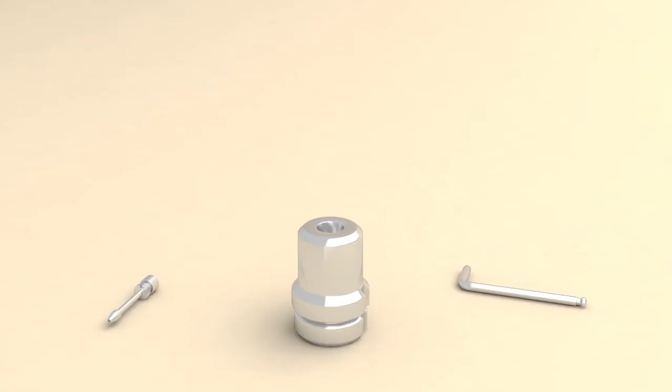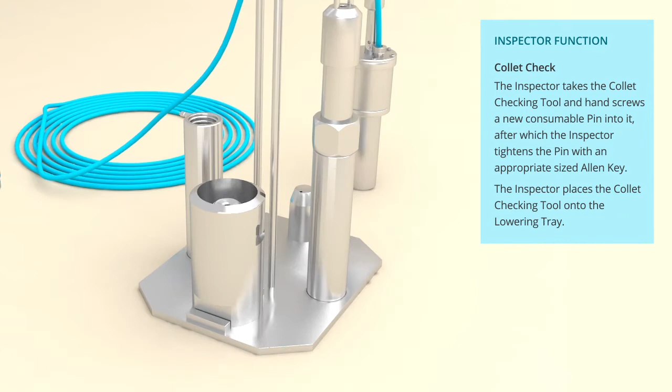Collet check. The inspector takes the collet checking tool and hand screws a new consumable pin into it. After that, the inspector tightens the pin with an appropriately sized Allen key. The inspector places the collet checking tool onto the lowering tray.

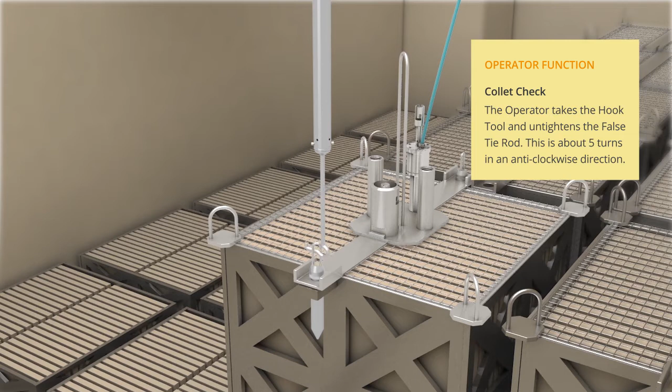The operator uses the crane to lower the lowering tray next to the tie rod that needs to be checked. The operator takes the hook tool and untightens the false tie rod. This is roughly 5 turns in an anti-clockwise direction.

Still using the hook tool, the operator places the false tie rod in one of the empty tubes on the lowering tray and turns it a couple of times clockwise to ensure that the false tie rod is securely fastened in the tube.

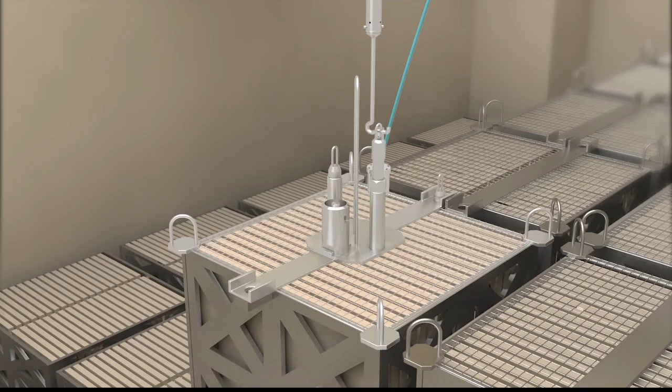The operator now unscrews the tie rod from the lowering tray, using the hook tool, and places it over the threaded hole. Tightens it clockwise with roughly 5 turns until it can turn no more. No torque is to be applied.

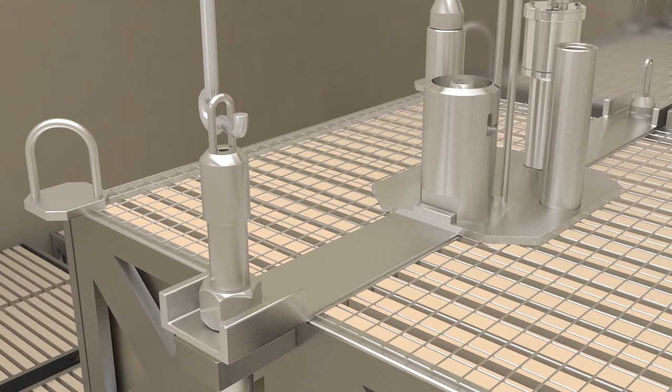To ensure the tie rod has been correctly threaded into the hole and is secure, the operator takes the hook tool and vertically tries to lift the tie rod. There should be no movement if it is placed correctly. The hook tool can now be hung from the bridge.

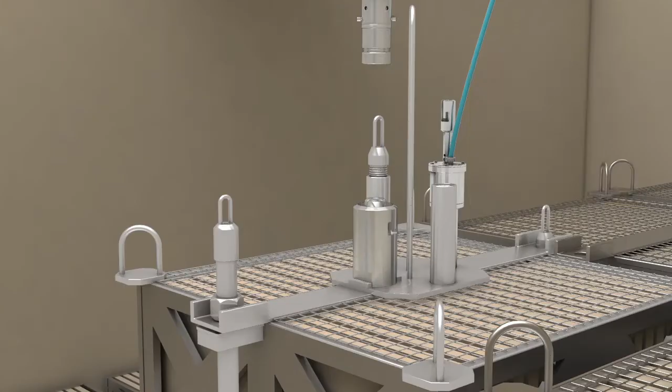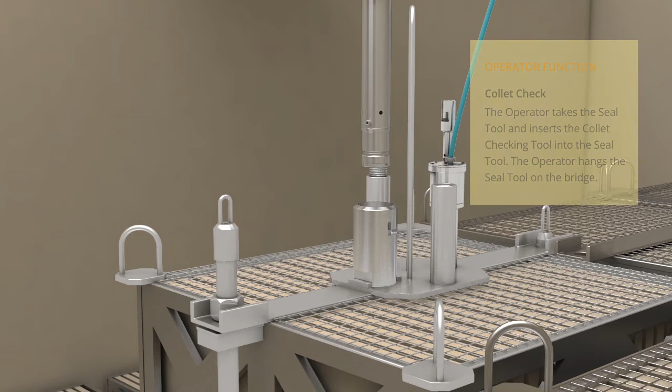The operator takes the seal tool and inserts the collet checking tool into the seal tool. The operator hangs the seal tool on the bridge. The operator takes the donut tool and places it over the donut on the lowering tray.

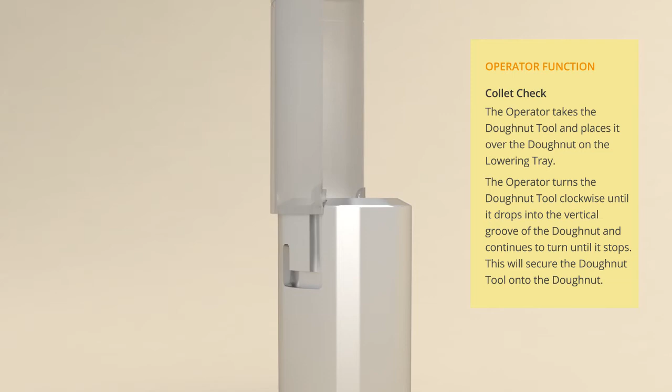The operator turns the donut tool clockwise until it drops into the vertical groove on the donut. The operator continues to turn the donut clockwise until it stops. This will ensure the donut tool is secured onto the donut. Still using the donut tool, with the donut fixed inside it, the operator lifts the donut off the lowering tray and places the donut tool over the tie rod.

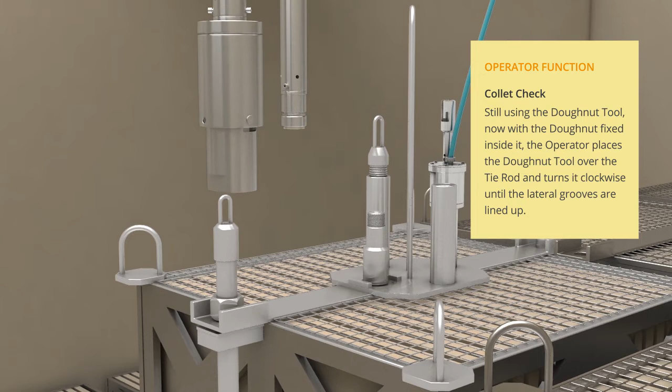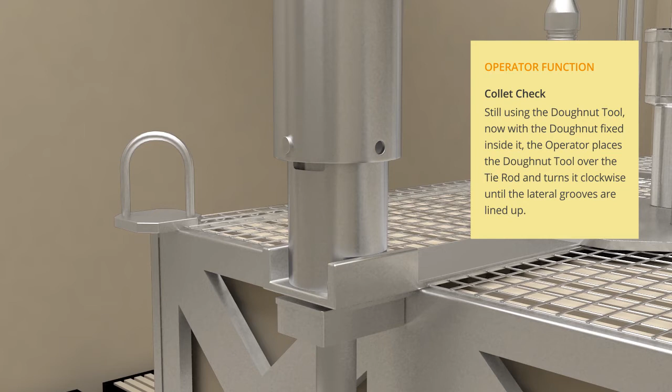The operator turns the donut tool clockwise until the grooves are lined up and the donut falls a few millimeters into the secure position. To separate the doughnut tool from the doughnut, the operator turns it anti-clockwise until it stops. The operator lifts the donut tool, which should now be separated from the donut, and hangs the tool on the bridge.

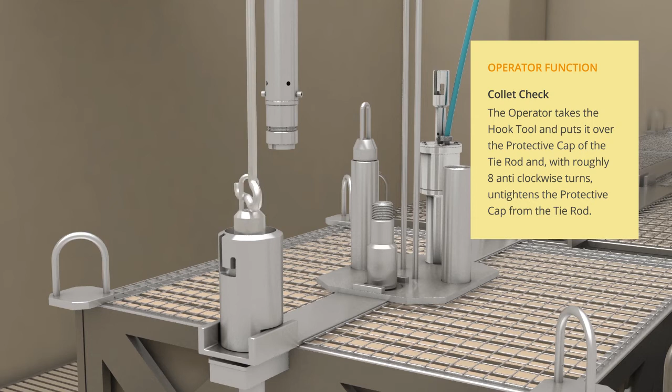The operator takes the hook tool and puts it over the protective cap of the tie rod, and with roughly 8 anti-clockwise turns, untightens the protective cap from the tie rod. Next, the operator brings the protective cap to the lowering tray where the seal was mounted and secures the protective cap with 2 clockwise turns. The hook tool can now be hung from the bridge.

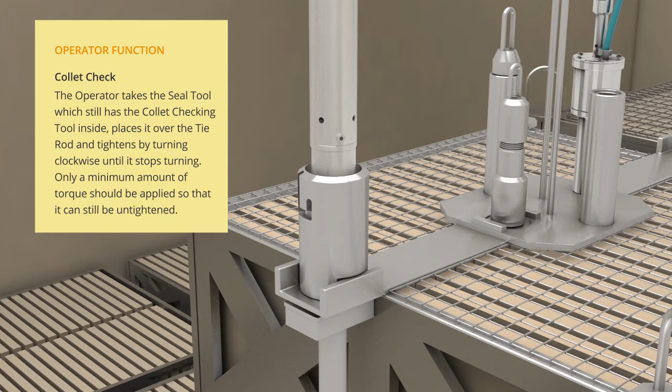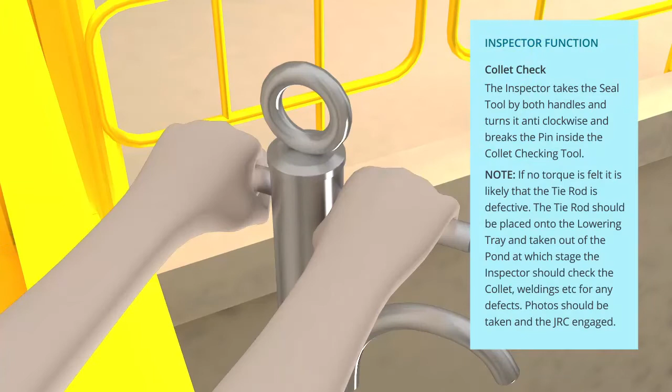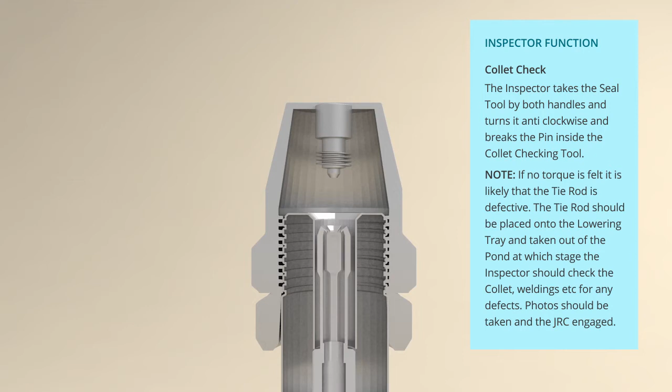The inspector takes the seal tool by both handles, turns it anti-clockwise and breaks the pin inside the collet checking tool. If no torque is felt, it is likely that the tie rod is defective. The tie rod should be placed onto the lowering tray and taken out of the pond, at which stage the inspector should check the collet, weldings, etc. for any defects. Photos should be taken and the JRC engaged.

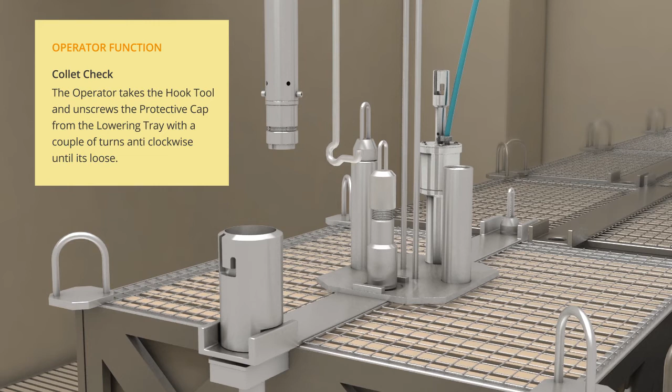The inspector removes the checking tool from the tie rod. The operator hangs the seal tool on the bridge. Next, the operator takes the hook tool and unscrews the protective cap from the lowering tray with a couple of turns anti-clockwise until it's loose.

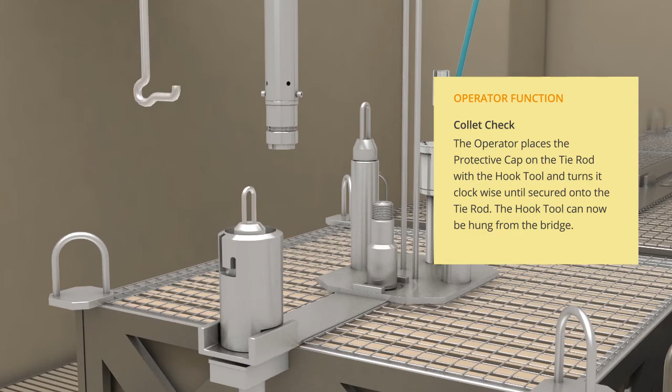The operator places the protective cap on the tie rod with the hook tool and turns it clockwise until secured onto the tie rod. The hook tool can now be hung from the bridge. The operator takes the doughnut tool and places it over the doughnut on the tie rod.

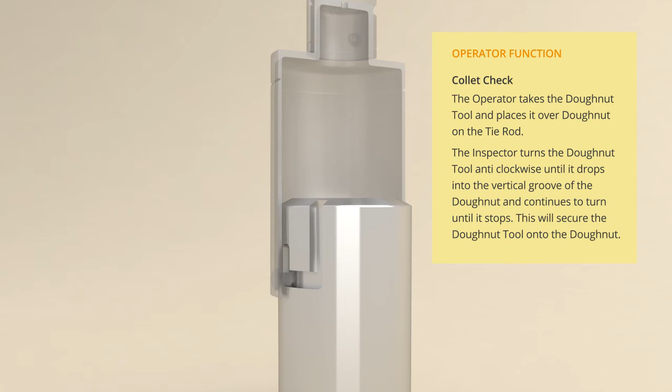The inspector turns the doughnut tool anti-clockwise until it drops into the vertical groove of the doughnut and continues to turn until it stops. This will secure the doughnut tool onto the doughnut, and it can now be lifted off. To place the donut onto the lowering tray, the operator holds the doughnut tool over the doughnut holder on the lowering tray and aligns it with the notch on the lowering tray.

To separate the doughnut tool from the doughnut, the operator turns it anti-clockwise until it stops. The operator lifts the doughnut tool, which should now be separated from the doughnut, and hangs the tool on the bridge, and screws the checking tool onto the lowering tray.

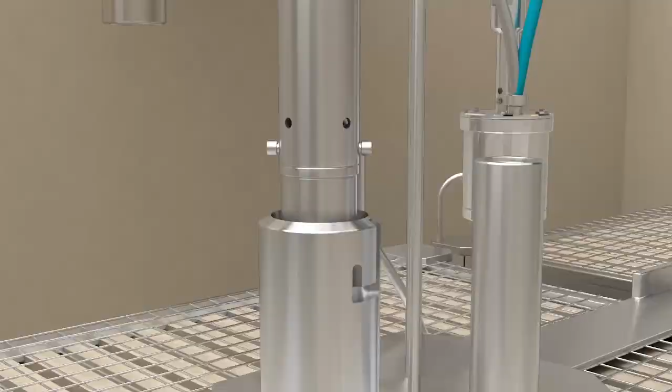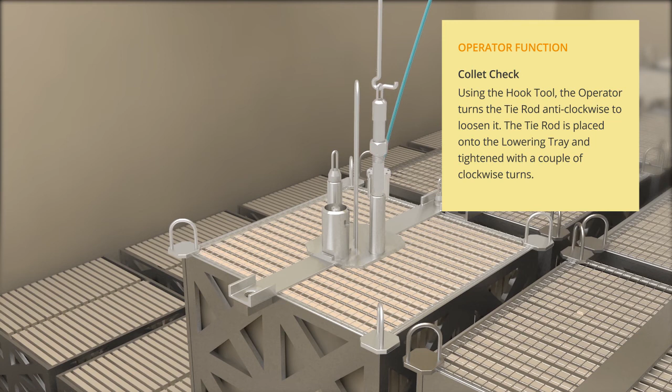The operator untightens the tie rod using the hook tool by turning it 8 times anti-clockwise. The operator lifts the tie rod using the hook tool, places the tie rod onto the lowering tray and tightens it with a couple of clockwise turns.

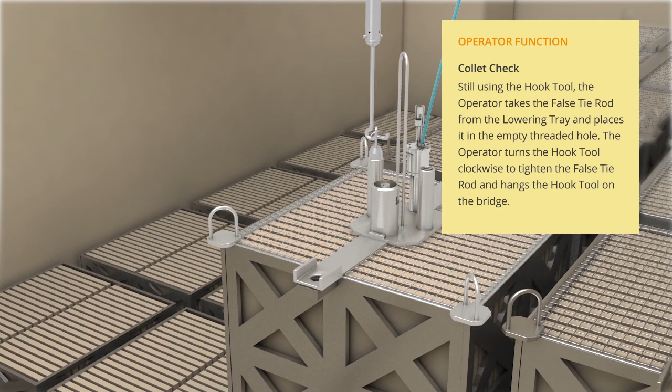Still using the hook tool, the operator takes the false tie rod from the lowering tray and places it in the empty threaded hole. The operator turns the hook tool clockwise to tighten the false tie rod and hangs the hook tool on the bridge. The operator raises the lowering tray to the surface and hands over to the inspector.